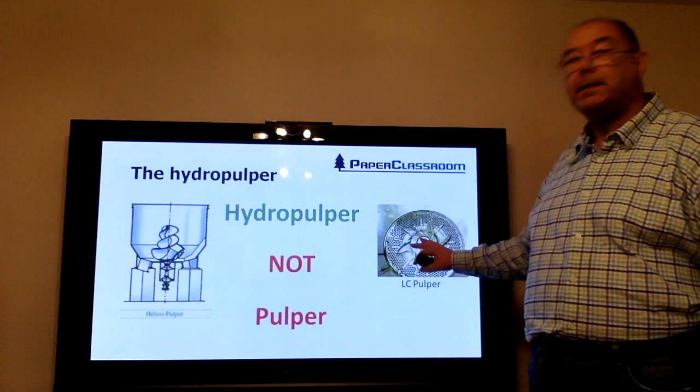One thing I always like to talk about at the beginning of these sessions is the fact that it is a Hydropulper. Everybody is lazy, no one likes to use big words when they can use small words, and so many people refer to it as a pulper. Those that don't know, because they're taking sheets of pulp and throwing them in a pulper, believe they are pulping. Not true. Pulping is the act of taking a whole plant, like a tree, and reducing it into individual fibres. What we're doing in this equipment is not pulping, it's dispersing.

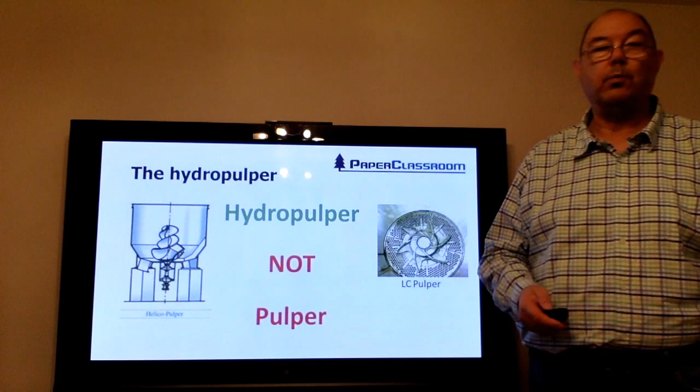We're simply taking the sheets of paper pulp that we're given and dispersing all the individual fibres, ready to do some work on them. Hydropulpers have a variety of different designs. At one extreme we have high consistency pulpers, at the other extreme we have low consistency pulpers, and in between we have medium consistency pulpers. In this section we're only going to be talking about the two extremes really.

So there are pulpers with top entry rotors. They're not very powerful, they can't break down very much fibre because it's going to be a really easy to break down furnish. Bottom entry rotors are by far the most common. We also have Hydropulpers with side entry rotors, particularly useful if you're in a confined space, if you don't have a lot of headroom.

And finally, there are such things called high-low pulpers. High-low pulpers used to have two different rotors, a high consistency version and a low consistency version, and it could operate in either mode. Very rare, you don't see those these days.

Low consistency pulpers - all pulpers have got both advantages and disadvantages, and that's the point of this session really, to be aware of the differences between high and low pulpers. So the advantages of low consistency pulping is the fact that you can operate it in continuous mode. You can feed in pulp and water and continuously draw out dispersed fibres. The other advantage is because it's so very, very aggressive, it will break down papers containing wet strength.

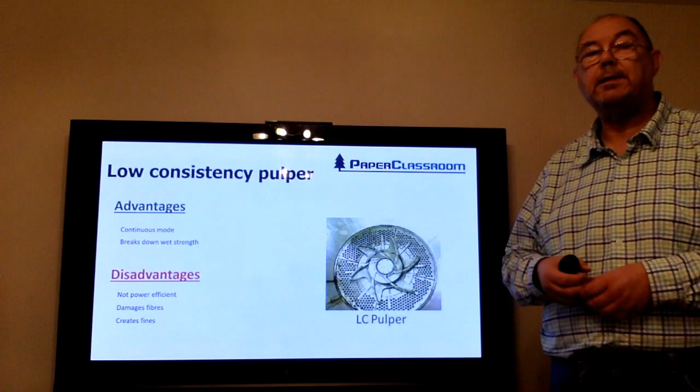However, the disadvantages, in my opinion, outweigh the advantages. It's not very power efficient. These things operate typically between 4 and 6% consistency. And if you're operating at 4% consistency, that means for every 4 grams of fibre, you're moving around 96 grams of water. So not very much of that electricity that you're paying for is going into the fibre itself - it's all been spent just turning water around.

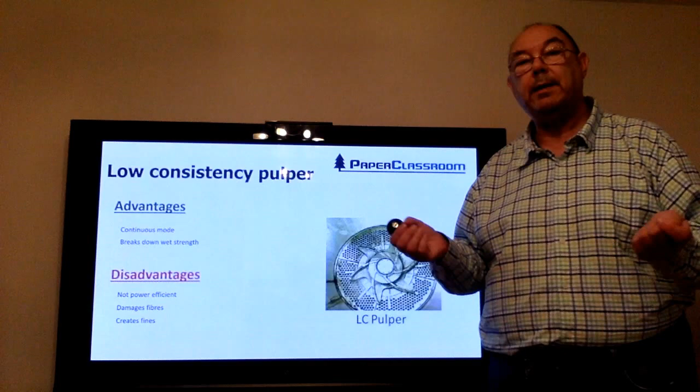Also, because it's so aggressive, it damages fibres. By damaging fibres, it can snap them in half, it could break the ends off, but essentially it's reducing fibre length. And by reducing fibre length, we can have fewer fibre-fibre crossovers, which means we'll have a weaker sheet. And if it's breaking the ends of fibres, then effectively we're creating fines. Fines are going to block up the sheet on the wire, it's going to reduce drainage, so it's going to go through the wire and we'll have losses. So fines are not very good.

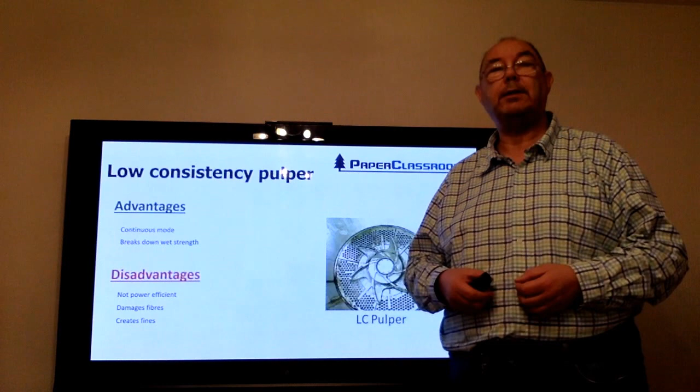High consistency pulpers - the advantages and disadvantages are almost the opposite. For example, they are very power efficient. High consistency pulpers operate 15 up to 40% consistency. So at 40% consistency, a lot of that electricity is being used to do work on the fibres, so it's much more power efficient.

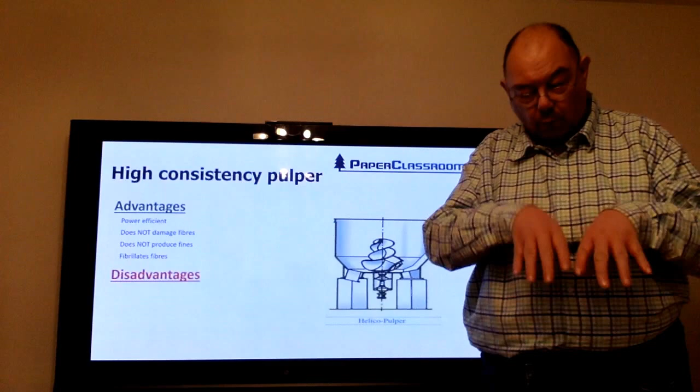These things travel around a lot slower, but with a lot more torque, and therefore they're nowhere near as aggressive as the low consistency pulper. Because they're not as aggressive, they will not damage your fibres. Fibres are much less likely to be snapped in two or for the ends to be ripped off. Therefore you'll retain a longer fibre length, which means more fibre-fibre crossovers, therefore a stronger sheet of paper.

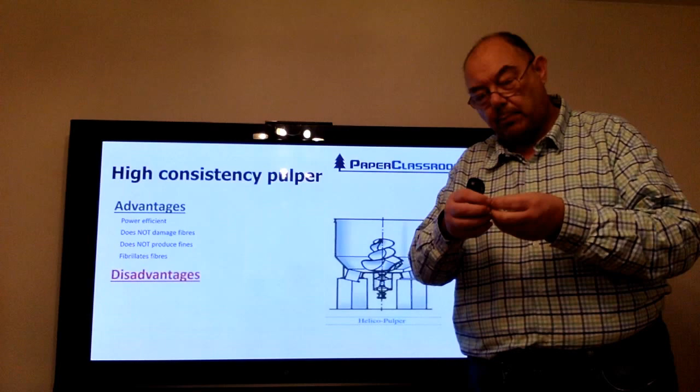Because you're not snapping fibres, you're not producing fines, and also because that concentration is so high of fibres, they will rub against each other. You will start to produce external fibrillation. So you're starting to do part of the refining process while you're still dispersing your fibres.

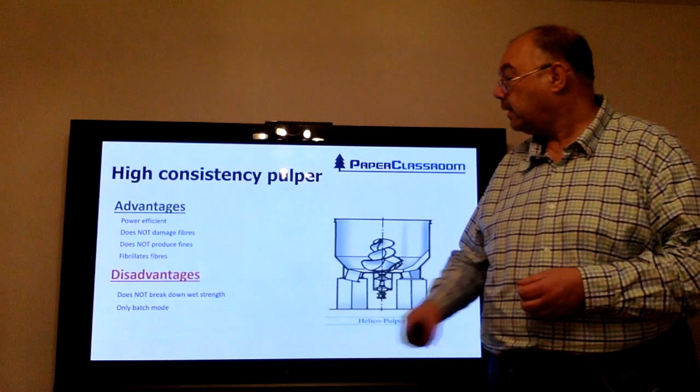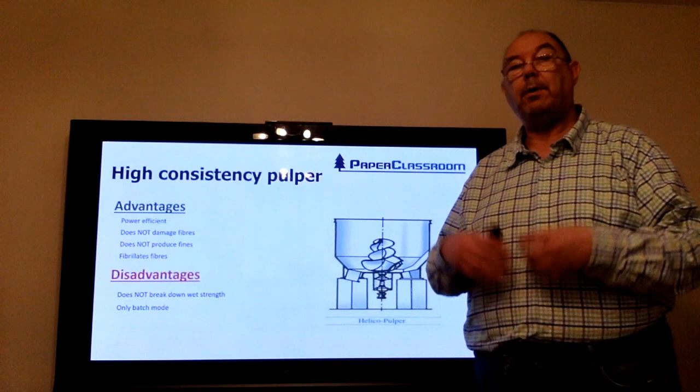And the disadvantage is, of course, it does not break down wet strength. You throw some wet strength paper in and it'll come out just as it went in. And of course, you can only use these in batch mode, not continuous mode. So you have to put the water in, put the fibre in, stir it for a while, empty it, start again.

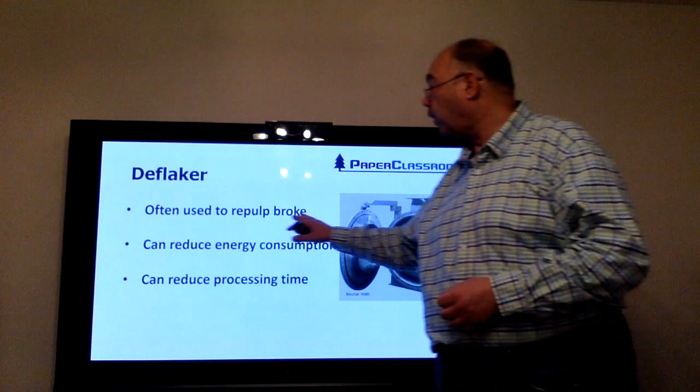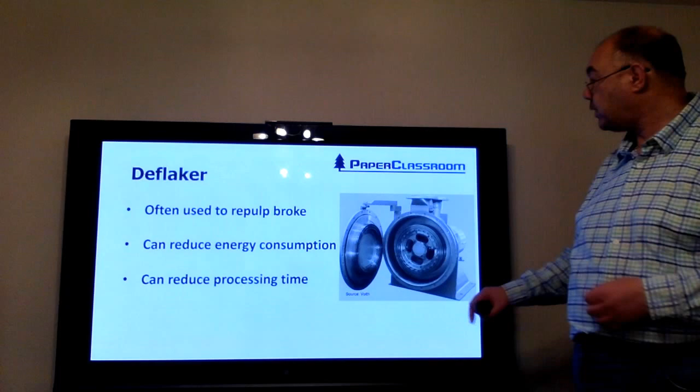Following a Hydra Pulper, we may often use a deflaker. Deflakers are more often used to repulp broke, but they can be used to reduce overall energy consumption and processing time. Here's one design of deflaker, and as you can see here and here, you've got pegs sticking out and the pegs interlace like that. So there is a bit of a gap, 2-3 millimetres gap.

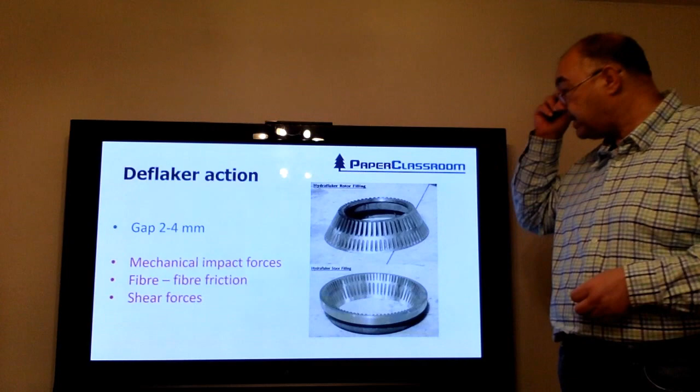This is a different design of filling for Hydraflaker, where these cones sit inside each other, but again, quite a substantial gap, 2 to 4 millimetres gap.

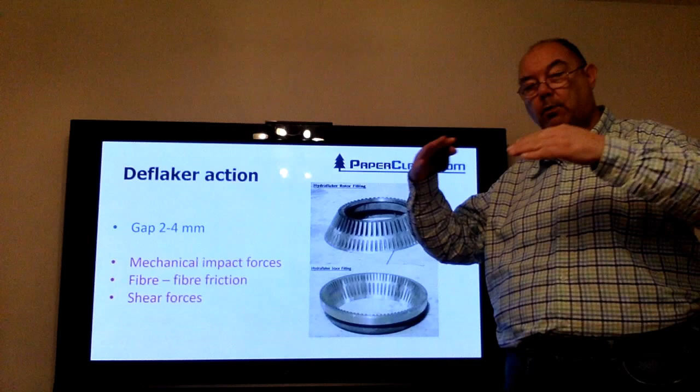The way that deflakers work is they rely on 3 actions. They rely on mechanical impact forces, where the fibres hit these revolving metal parts. They rely on fibre-to-fibre friction, where the fibres rub against each other, or the flakes rub against each other, and the fibres are teased out. And they rely on shear forces. So you've got shear, water travelling one way, water travelling the other way. These hydrodynamic forces will tear apart flakes of fibre and reduce them to individual fibres.

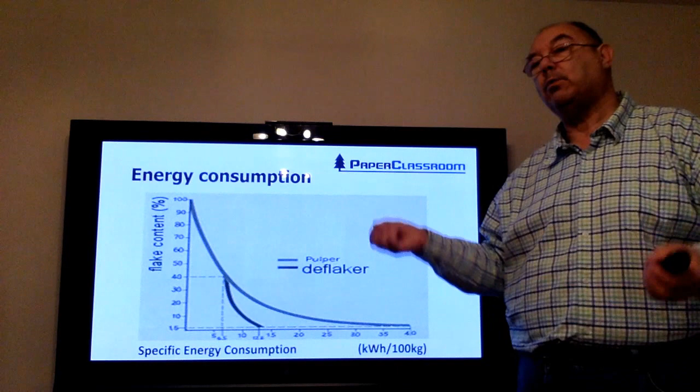This graph is a very telling graph that explains quite clearly the advantages of using a Hydra Pulper followed by a deflaker. If you look at this curve, first of all, this is power consumption. So if you throw in, for example, a sheet of fibre, then it's one giant flake. As it gets torn apart, it becomes smaller and smaller flakes, individual fibres are released, and this curve here is measuring the flake content. So at this point here, where you've just got 1.5% of flake content and everything else has been reduced to individual fibres, it's taken 40 kilowatt hours of energy to reduce 98% of 100 kilos to individual fibres.

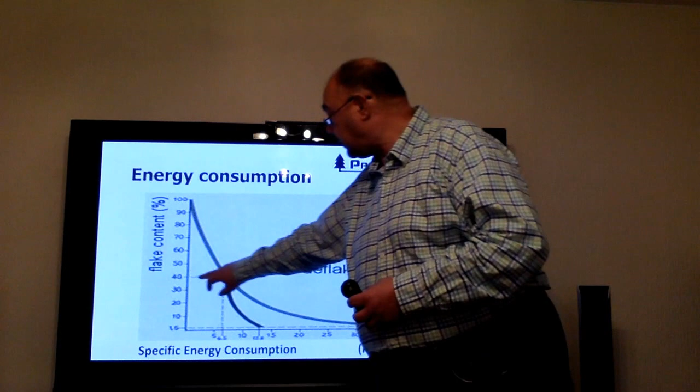By using a deflaker, you can reduce this energy considerably. What you would do is load up the Hydra Pulper. When the flake content is down to about 40%, rather than continuing it in the Hydra Pulper, you then empty it and pass it through the deflaker, and it then follows this line.

So you've now only used 12.5 kilowatt hours per 100 kilos rather than 40. So you've reduced the total energy consumption by about two thirds.

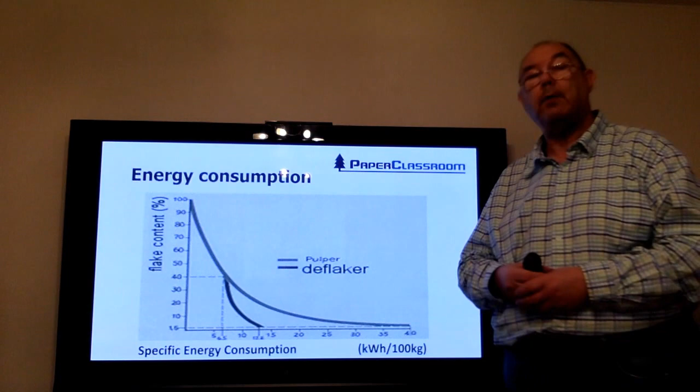So a summary of what we've said today. Rotors going into Hydra Pulpers can come from the top, from the bottom, or from the sides.

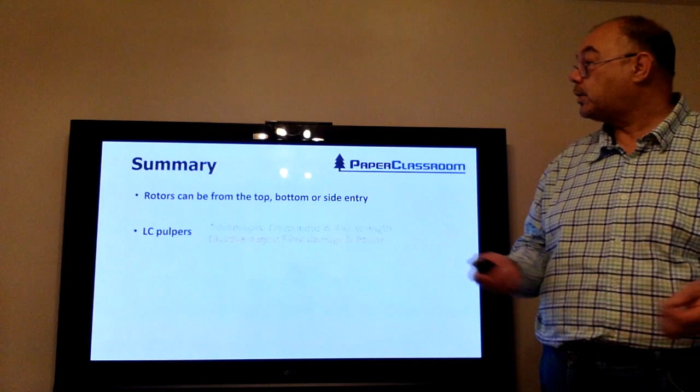Low consistency pulpers have advantages. Operating continuously will break down wet strength, and they have disadvantages. They damage fibres and they have poor power efficiency.

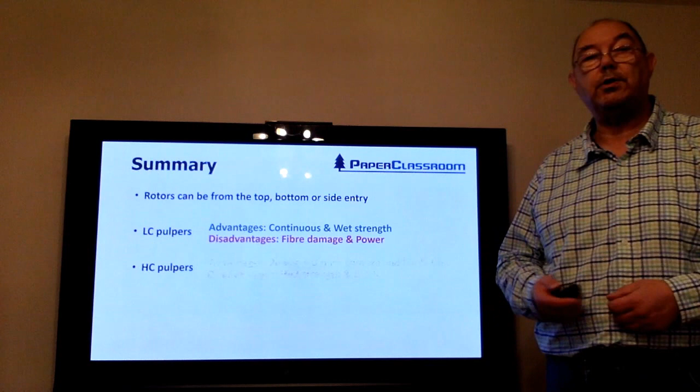High consistency pulpers, advantages and disadvantages again. The advantages: much more power efficient, no fibre damage, and you get fibrillation, which is helping the refining process. Disadvantages: does not break down wet strength, and it can only be operated in batch mode.

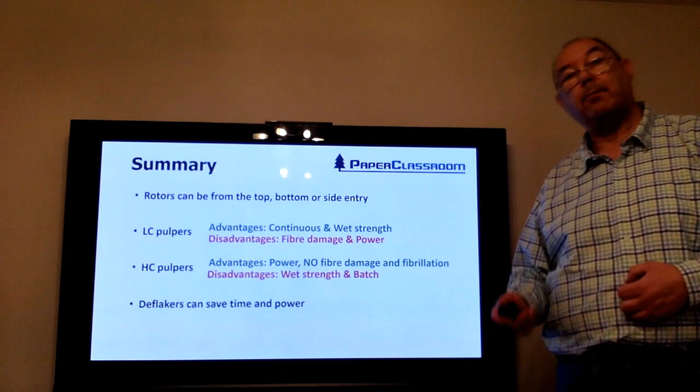The deflakers can save you time and power. And finally, the deflaker action relies on 3 types of force: shear forces, mechanical impact forces, and fibre-fibre attrition.